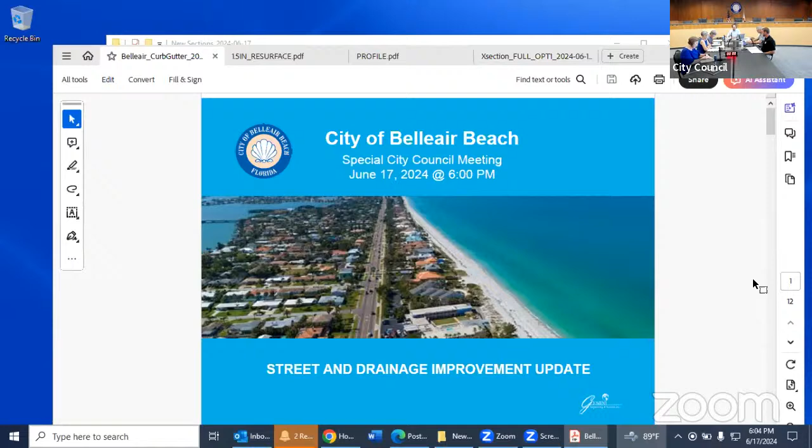Anyway, the work for the project is taking out the existing curb and milling the existing pavement, the existing 1 inch, and then replacing it with 1.5 inches of asphalt and replacing the curb.

And the curb, the direction that we have given the contractor, is the curb is to be constructed with a continuous fall, so that when it's laid and done, it'll have a continuous flow, no puddling or any low spots. The transitions into the driveways will be smooth, and at the ends, at Gulf and Bayshore, they have to make sure that we meet and match the existing pavement.

The difficulties that we sometimes have with that need of meeting the existing road at Gulf and down at Bayshore, and the road being so flat, is the difficulty of giving enough drop to lay in the curb and lay in the asphalt.

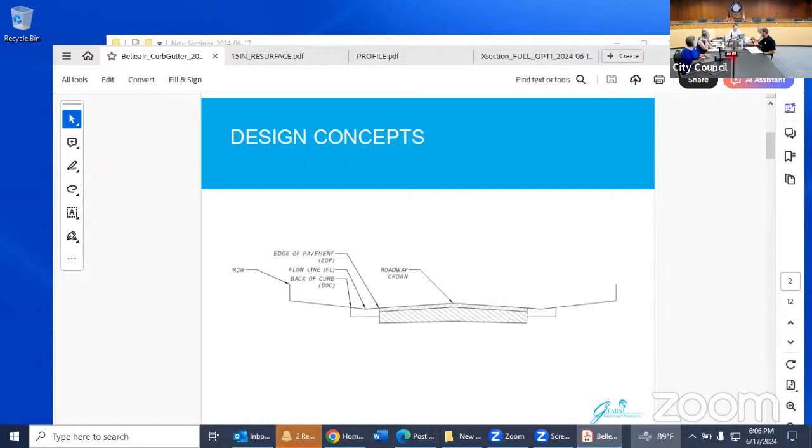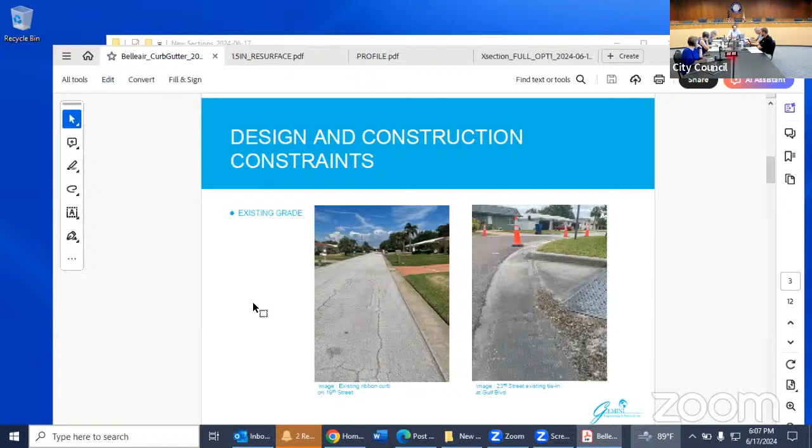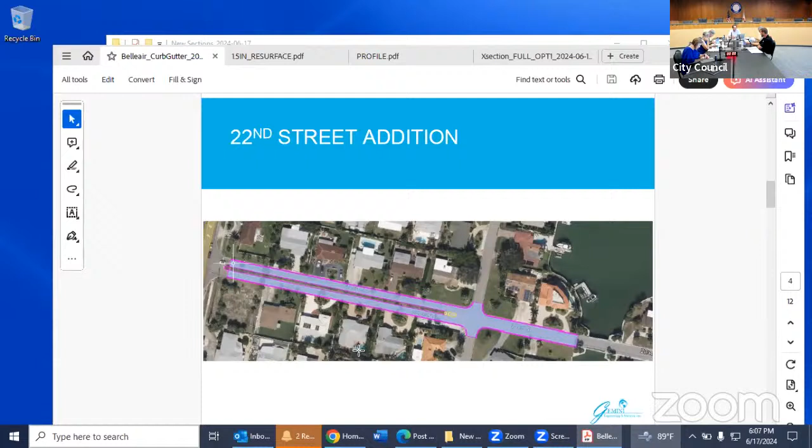I'll go ahead and move on to 22nd Street. We're saw cutting the curb and leaving along the pavement that was just put on there, and this represents the limits of the work. So with that, we created our quantities for that.

Based upon our estimate for the work on 22nd, with the saw cutting, the valley curb replacement, restoration of some of the concrete areas, restoration of driveways, and any miscellaneous work as far as sprinkler or utilities, we estimate that project to be $250,593.

Any questions so far on that? Any questions, council?

On 19th Street, where you said there's currently the ribbon gutters in there, I really feel our real objective is to make sure whatever we have there is in fact moving the water to where we want it to be moved, into a drainage system. I live on 20th, so I drive by there all the time. We had a pretty decent rain last night, so I went by this morning, and there's zero standing water on those ribbon gutters. So to me, I don't care if it's a valley gutter, a vertical gutter, or a ribbon gutter - the water's moving to a drain somewhere, which is our ultimate goal.

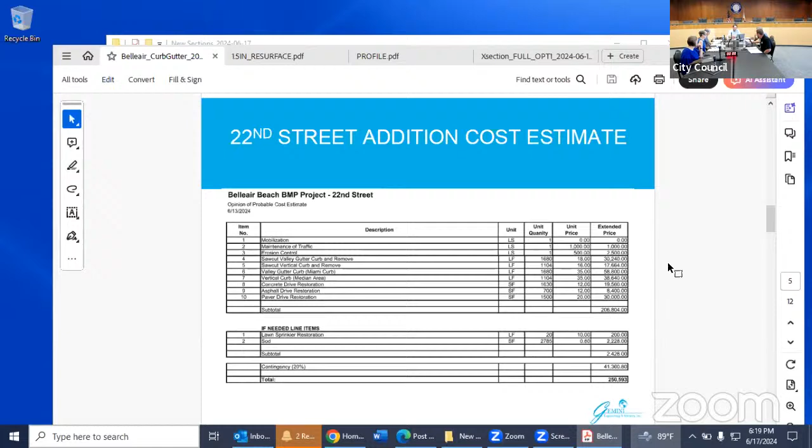And they're forming up these entire streets, measuring it out with string line. I know they have curb machines now, but I don't know with all the variables if this curb machine could do a better job. When they did it at Belle Isle and everything like that, they were doing it all by hand, and I'm thinking like, my God, it takes so damn long. You can lay a lot of footage in one day with a big valley curb machine - I call it the Miami curb machine. I don't know why they didn't do it, they probably just didn't have access to it. Yeah, to date, no contractor has used the curb machine that's bid on our project.

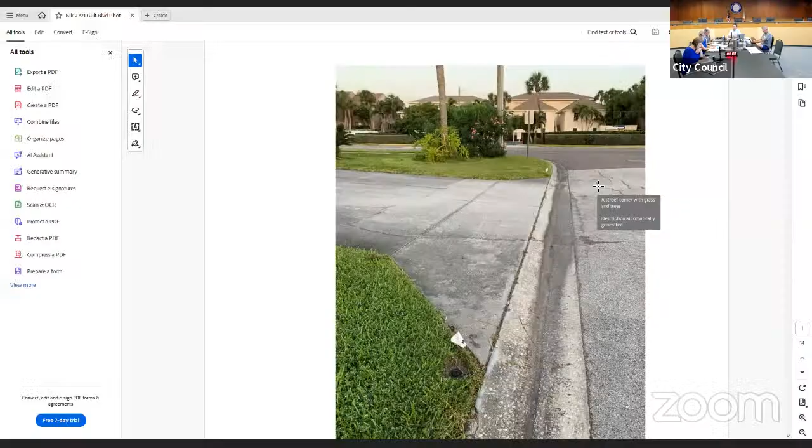Mr. Mayor, ladies and gentlemen of the council, my name is Nikolai Novoselis and I'm the corner property owner, southeast corner of Grove and 23rd Street. Right now on the screen, you see what we had before, the V-shaped curb, and the water was flowing.

This is the existing one, no V-shaped curb. From the beginning of the driveway towards Grove, it's a negative pitch, 1.5 inch. Water stays there by the walkway. This is from last night's rain - some people are trying to jump and they land in the water. That's the southeast corner of Grove and 23rd.

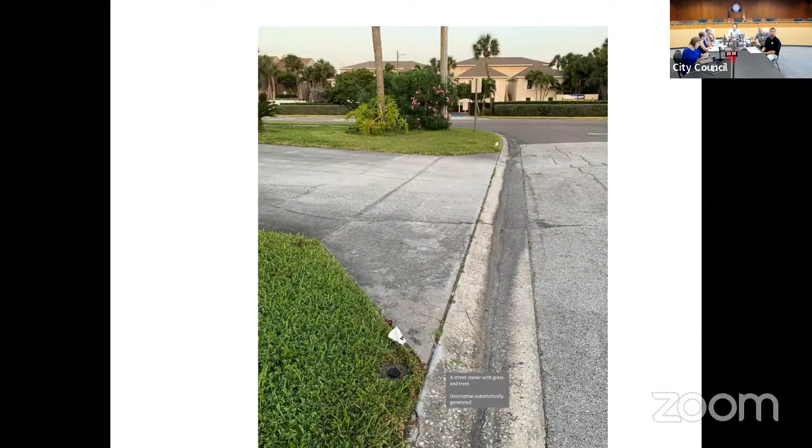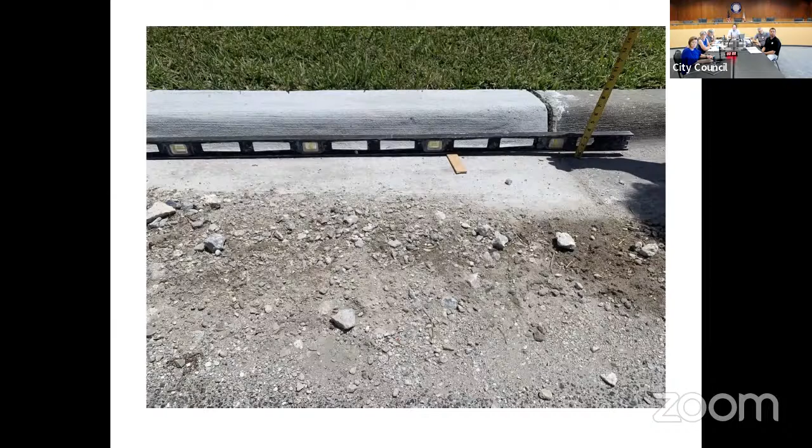That's what we had - a V-shaped curb, water flowing down all the way. The curb was broken in many places, and it was building up dirt, so it's an old curb. This is the difference right here, where the new work starts on Grove and 23rd going down towards Bayshore. This is the beginning, the negative pitch - that's the difference you see. Here's the new curb and the existing one, Grove and 23rd. This is the end.

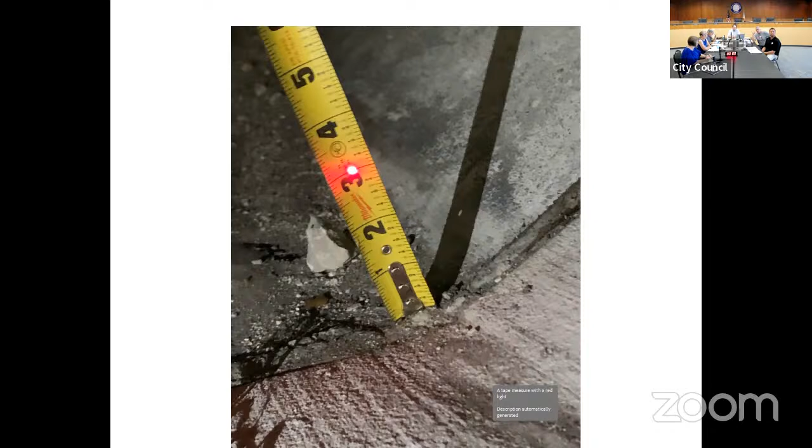Bayshore and 23rd - the first 12 feet of the curb has approximately 2.5 inches of pitch over 12 feet. This is not a Q&A - right, it's not a Q&A. You'll notice here a shim underneath, right from here. So the engineer said approximately on every 100 feet, we have 2.5 inches of pitch to use, but here on only 12 feet, they used 2.5 inches.

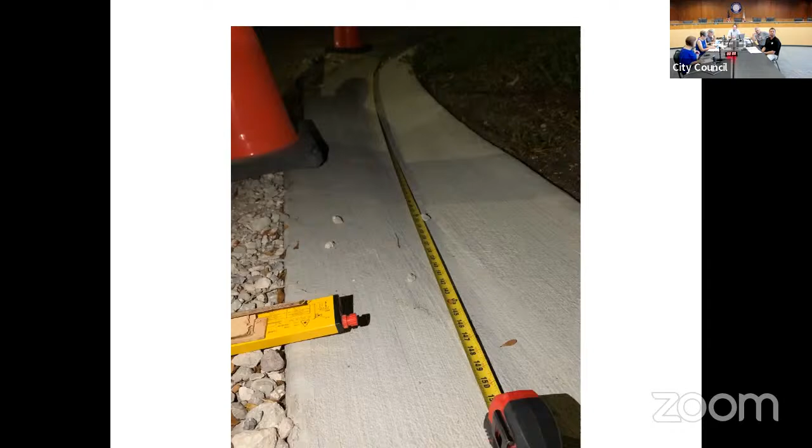As the beginning, Bayshore and 23. This is how much higher

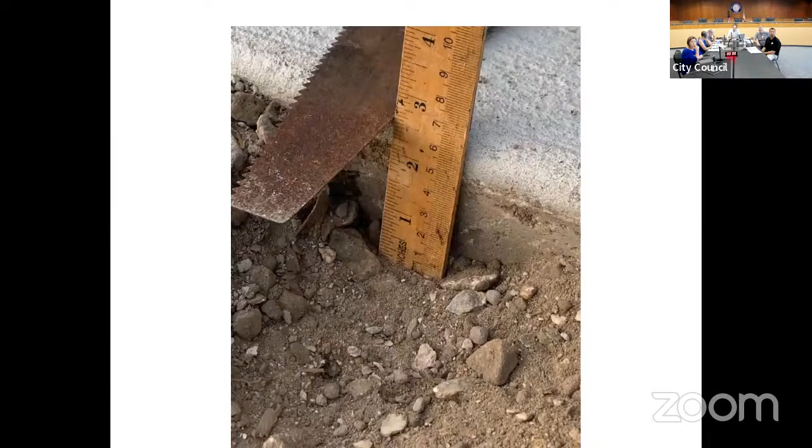The outside edge of the curb is towards the asphalt. It's about 2.5 inch from what it was, and it's consistent from the bottom of the street to the top. That's the bottom, 2.5 inch. That's the top of the street by me. So obviously it was by design.

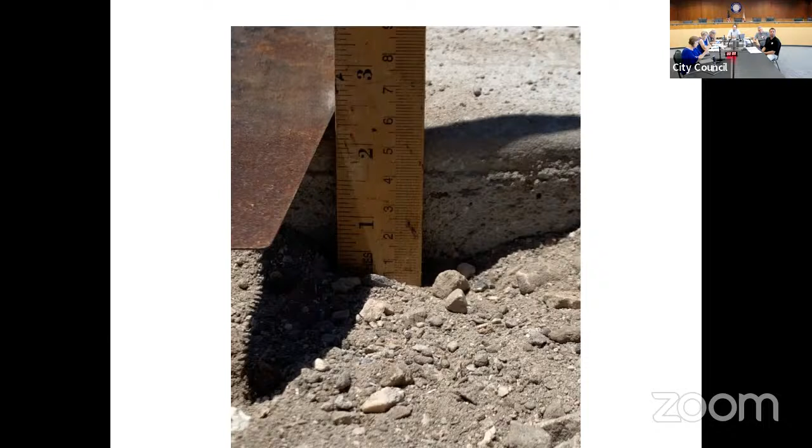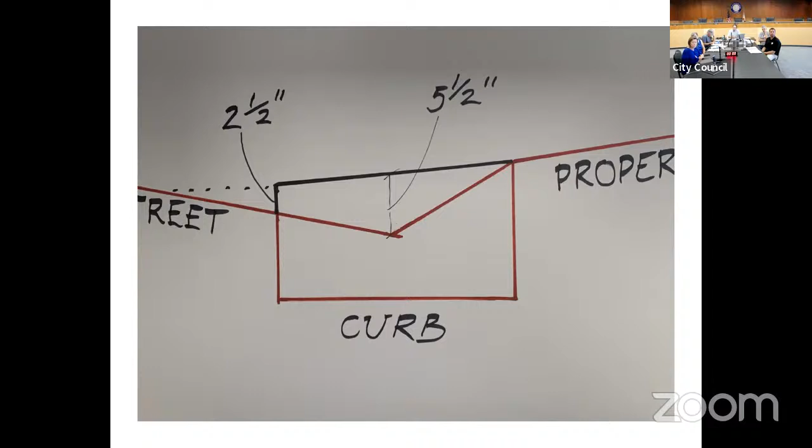So this is in red. You see the existing curb that was taken out, and in black on top you see the new one. So you see that the V-shaped curb is gone. It's replaced with a flat one, which is 2.5 inch higher than the street level of the asphalt, and technically we lost 5.5 inch of the curb, the V-shaped curb, right by the middle where the water flows.

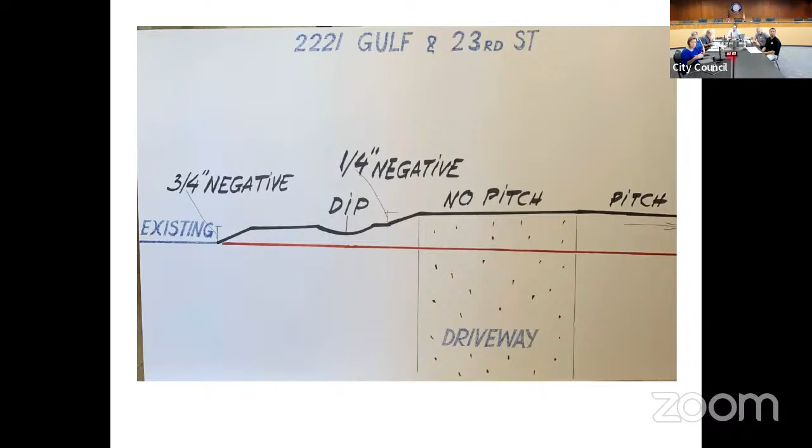All these thousands of dollars will do what? Nothing new. That's what we had last night. Thank you, I appreciate it.

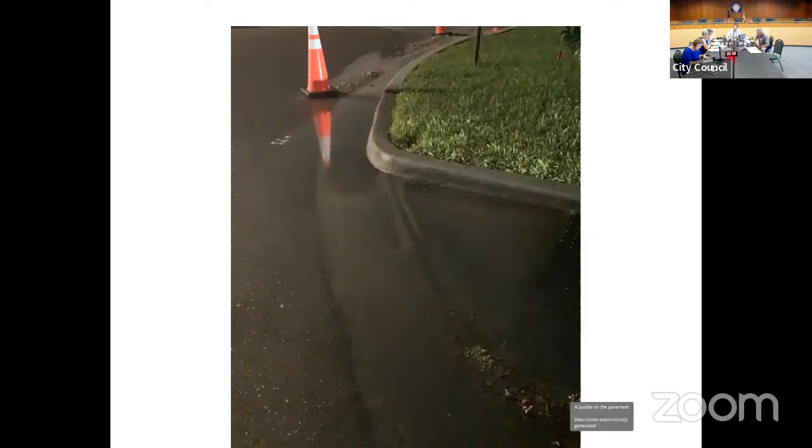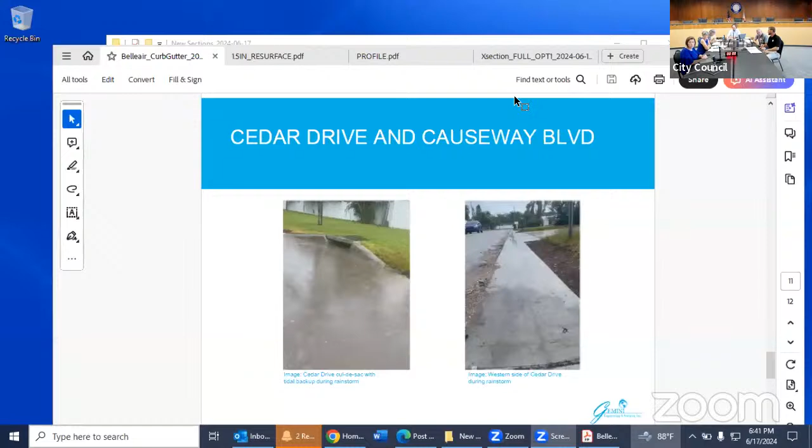Let me get to it, I've just got to learn how to get that on this computer. Well, you may need assistance. I already want to look at photos, I'll just put it on the screen. Let me get down to it.

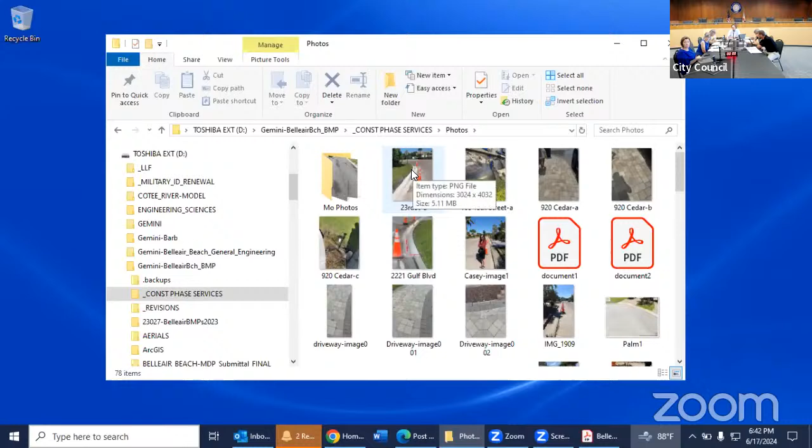This is another view of that photo of 23rd and Gulf. Okay, so the curb was raised up to get better flow towards Bay Shore, correct? And now you're thinking that because the asphalt is lower than the curb, it's trapping it?

If I can ask the contractor to come up, he can explain the details, that with the flow line coming around and the edge of the driveway, the asphalt created, instead of having a deeper V to keep that going, that V got a little bit more shallow. Is that right? Yeah, okay.

I can speak a little bit to this situation, if you don't mind. My name is Anthony, Harbor Contracting, I'm the president. And this is my foreman Levi, who's on site every day working through this. Just a couple issues, some concerns and things to bring up to date for you.

When we were given the project and bid it, the only constraint on the project is a note that says curbing to be laid out so water does not puddle and to prevent ponding. No grade stakes are given to us, no grade elevations are given to us. The only thing given is if the road has a high point in the middle, or if the road flows at a consistent grade from one end to the other.

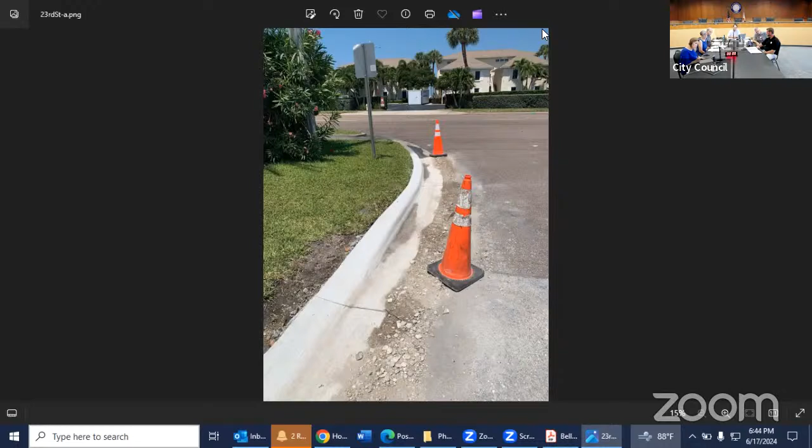So in this situation on 23rd Street, it flows from Gulf Boulevard to Bayshore. Now you have two constraints: the flow line constraint, which has to stay the same because you're tying into two points on Gulf Boulevard and Bayshore, and the front board, which has to stay pretty much the same because it ties into the asphalt.

The curb that we took out, that's not a valley - it went flat and then up, kind of a slight rise like this. What you're asking us to do is put in a valley, which isn't possible. What you're really looking for is more like a road reconstruction project, where you go back on all the aprons, take them all out, and re-change the road profile entirely.

So what we're doing here is trying to match existing grades and get the flow lines to work. When we put the front board in and the flow line in, shaping it with the level to get the flow line going, as you get from Bayshore you'll have a deeper V, and as you get to Gulf, the V will slowly disappear.

As you pointed out on the one street that had the header curb - the reason there's no water ponding there is because they took one point and the other point and drew a straight line, and it flows down that straight line. There's no valley in there.

So what we're proposing in these situations is to put the asphalt an inch, an inch and a half lip in front of the curb, to kind of give it a pseudo-V, where it'll keep the water in the curb - sort of enhancing it. Exactly.